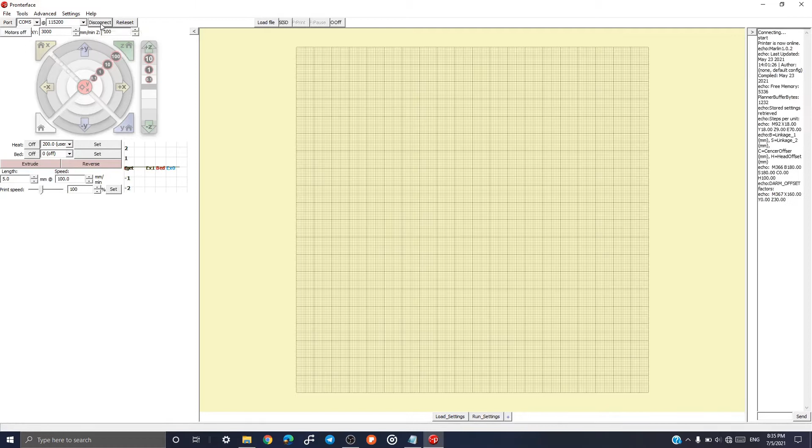So the first thing you have to do is connect the laptop to the Arduino board using the USB wire that comes along with the Arduino. Once you get it connected, we have to connect this Pronterface app to the Arduino board. So we can press the connect button over here. After we press the connect button, we can see that we'll have all the values over here. These values are nothing but the default values that you have set in the Marlin software.

In some cases, when there are connection issues, we might find some garbage values over here. In that case, you can try to change the baud rate or the port number. The baud rate is essentially the speed at which the computer sends information to the Arduino board. We have a lot of options like these values, and this one depends upon the value that we have given in the Marlin software. In our case, the value that I have given is this value, so we can set the same thing up over here. In case the baud rate is different, we'll get some garbage value. So that is one troubleshooting tip.

And the next thing is the port. This one is the port of the laptop. I have two USB ports, and COM5 is the default, I guess, so it is taking that one. You can try to change this value as well in case there are connection issues.

Once this is done, we can start with the printing setup. First thing, we have the temperature over here. We can set it to 200; for PLA, 200 is the optimum value. So we can start by setting this one up. Make sure that the printer fan is also running, the hot end fan. Once this is set up, we'll see the values over here. The dark blue line represents the target value, and the EX0 indicates the extruder 0 value. So let it run up.

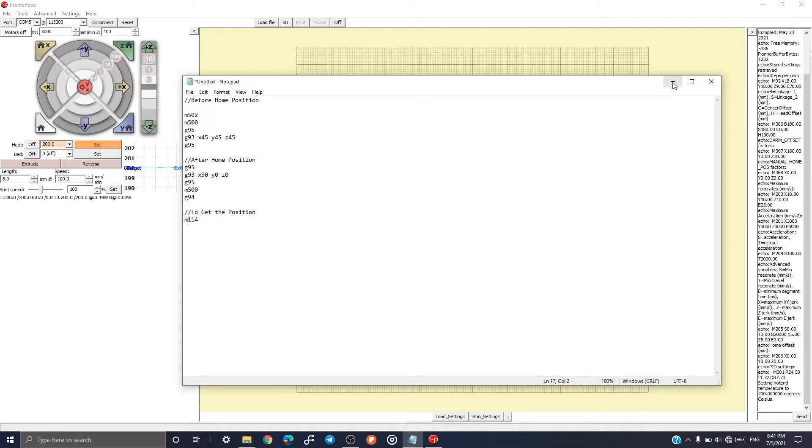So the first thing is we have to set the robot to the actual position. This is not required, but since we can do it, we will just do it, since it is starting. So once the robot has been kept in almost the accurate position that we require, we can start by giving those values. So the first thing is M502, M500, G95, G93, and G95. So I have integrated all these values into a single macro command over here, load settings.

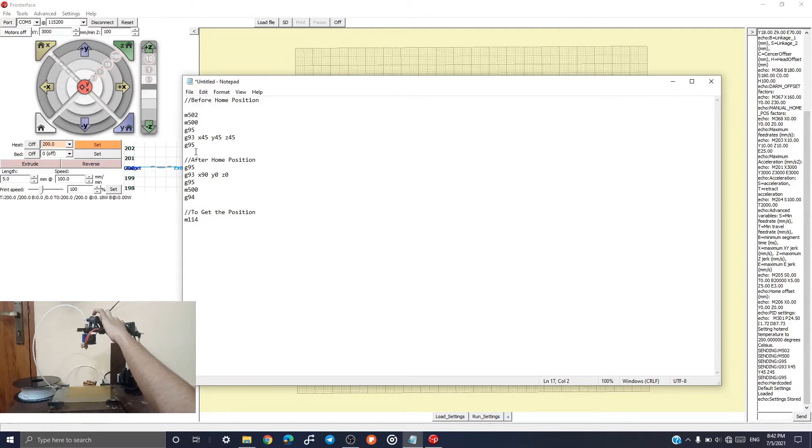So once I give the load settings, all these values should have been automatically inserted to the 3D printer. So after this is done, we can start by just powering the motors. So it will be like Y1 degree, X1 degree, and Z1 degree. So now if I leave the robotic arm, there won't be any issue since all the motors are energized. So now we can just slightly bring it to the required position.

So we have to see that the robotic arms are at 90 degrees to each other. So I'll just move it accordingly. So as per the program, we can see that the main arm is the X motor, the smaller arm is the Y motor, and Z is automatically the base motor's direction. So we can move it accordingly.

This was a problem I had, how to differentiate them. So as per the code, these are the values. So that is one thing. And once the robot is set to the home position, that 90-degree position, we can start the next step. So the next step will be the run settings. So these are the values which I have given.

Again, G95 is the angle coordinates. G93 is telling the robot its position. Like here you can see it is X90, Y0, Z0. So it says that the X motor is in the 90-degree position, and Y and Z are in the 0-degree position. And again we have G95, which states that it is in angle coordinates, and M500, we know that it saves those values, and G94 again we are giving.

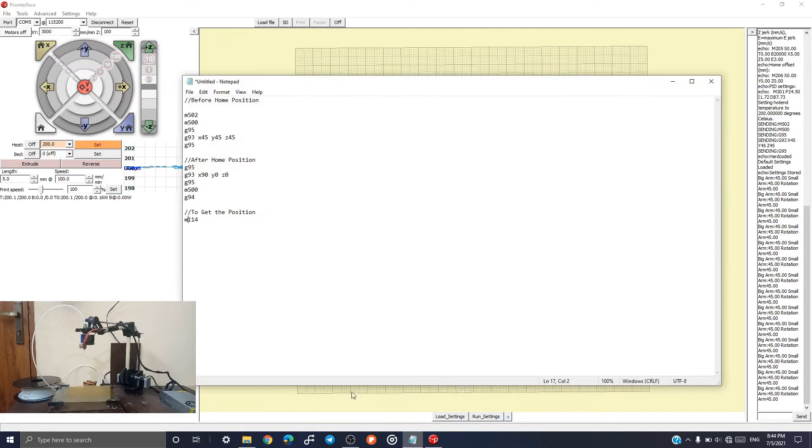So again, similar to the previous thing, I have integrated all these codes into one single macro over here, which is the run settings. So you can just create a setting of your own by using this add command. I have created mine over here. So it contains all the code that I have shown you previously. So once the robot is in home position, you can press this run settings.

So once this run setting is given, the macro actually injects all these code values, and now the robotic arm knows its position, that it is in home position. So for checking that, we can just give the next command, which is M114. M114 actually gives the position of the endpoint. So I'll just give it. Now you can see over here below, it is X120, Y0, Z150.

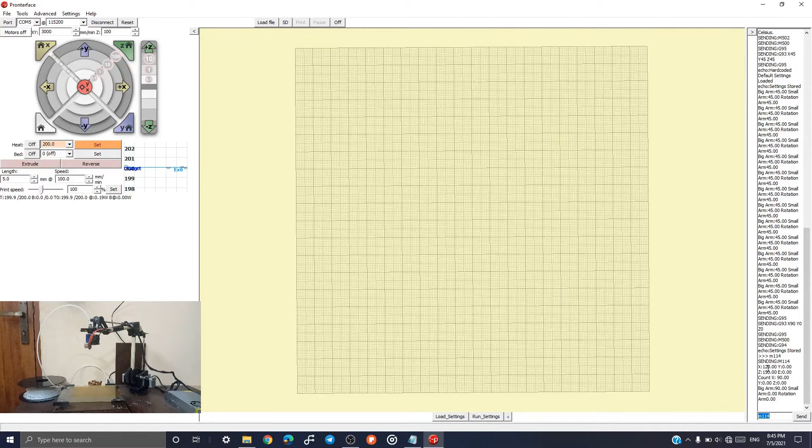So while the home position is the 90-degree positions, we need to bring it to the 000 point first to start printing. To bring it to that value, we can see that X has to be moved by minus 120. So we'll just move that one. And we can just give it by alternating values. So X I have just given 4 times, I guess, and now we can see that Z is plus 150. So we have to bring it to 0, and so we can just give minus 150.

So Z-axis motion is a little bit slow, it is built in the program like that. If you want, you can just change those values also. As you can see, the endpoint is actually moving downwards. It actually is trying to go to this position that we have kept over here. So now we can just check the position by giving the M114 command. Now you can see that X is 70 mm, and Z is 80 mm.

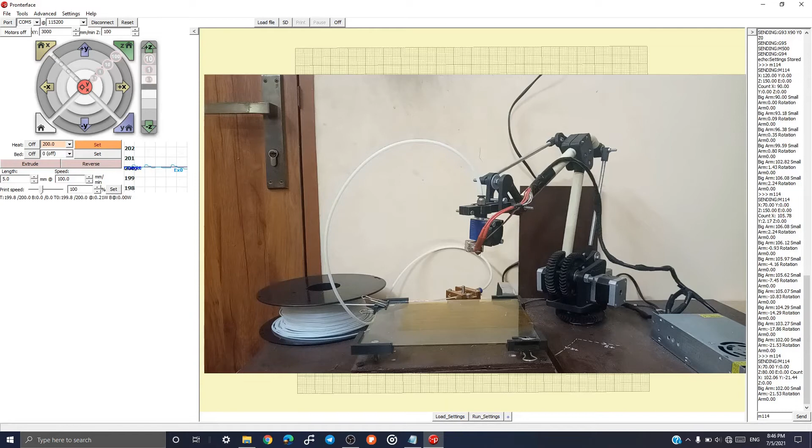So we can just give the minus values. So minus, 6, 7 times, and Z we can just give alternatively. Z is at 80, and we have to give minus 80. So I just pressed the minus 10, 6 times, so it will just go 60. And since our printer is a different build, we have to make sure that the different arms don't collide with each other. So we have to give alternate values like this.

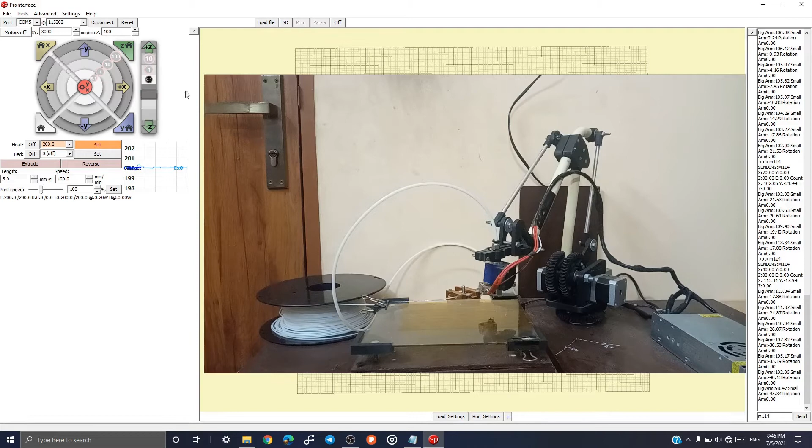Now you can see X is at 40 and Z is at 20. So X we can just give as minus 40, and Z we can just give as minus 20. And before starting, in this robot the nozzle actually touches the build plate, so better we start everything, set up everything else, and then we can just go to the 000 position.

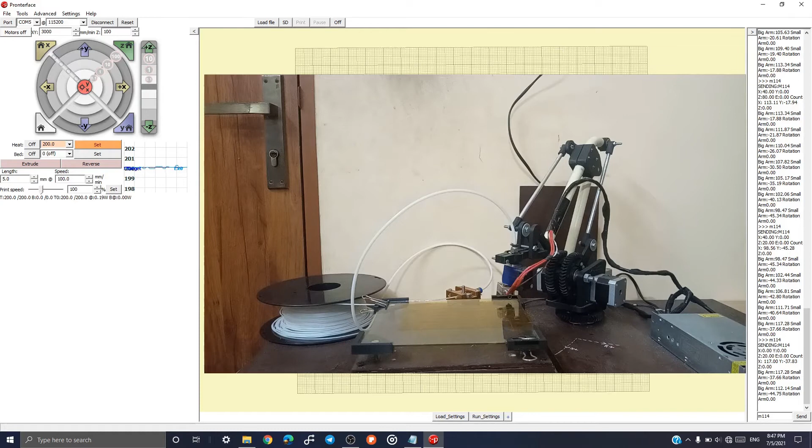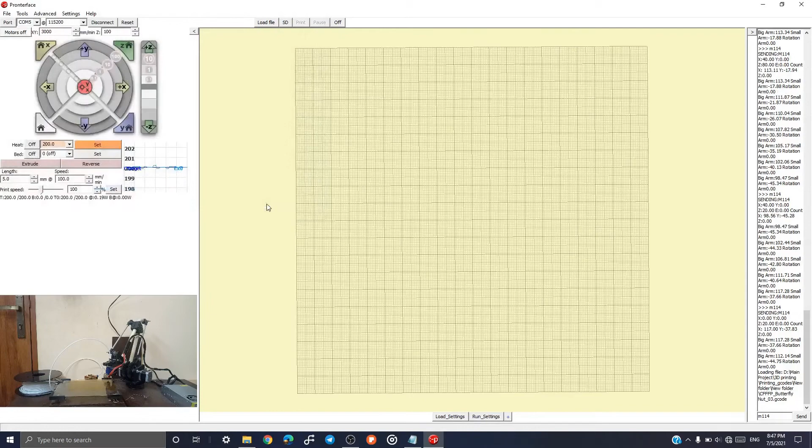So the next thing is we have to load the G-code, and we can just do it by pressing this button. So this is the file that I want to print. I can just open it. As you can see, it is a G-code file, but we have other options such as STL and all those things. So that is one option. And once we load it, we can get a preview of it. So this is the part that I want to print. So now we have loaded this file. You can go to the 00 position and start printing.

So now if you see the M114 command, we can get the value of the endpoint as 0, 0 and 10. So Z must be moved minus 10 along the axis, and I'll just move it. So once this is in position, we can start printing.

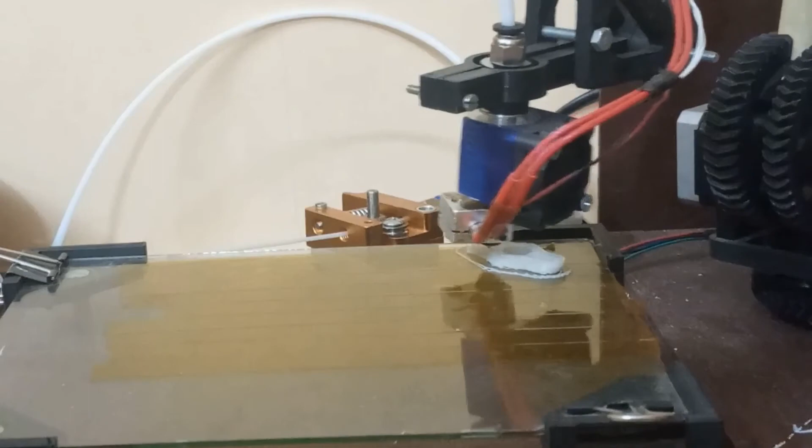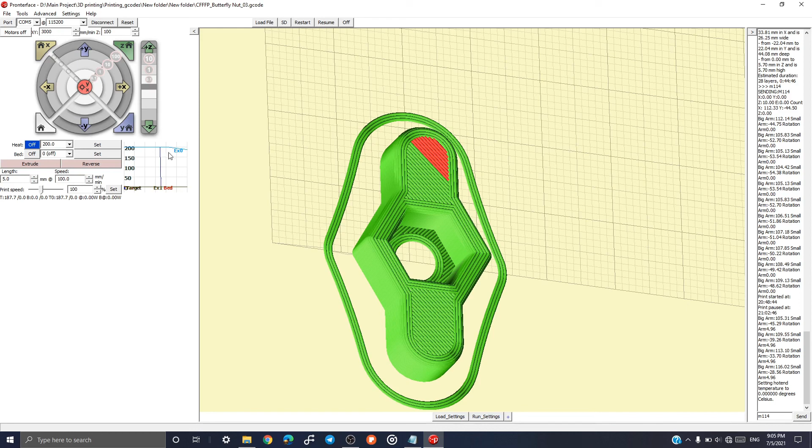So once we have finished the printing, we can just switch off the heat over here. And once we switch off the heat, the graph changes again, and the dark blue shows the target temperature, and the blue line shows the temperature of the nozzle. So we have to make sure that it is almost nearing 100 before we switch off, so that there's no abrupt cooling, and it cools normally. So that's all. We have got the printed part, and that is how we print using this robotic arm.